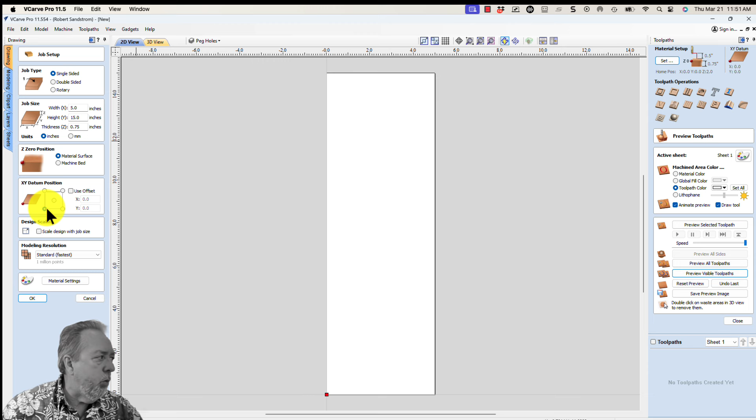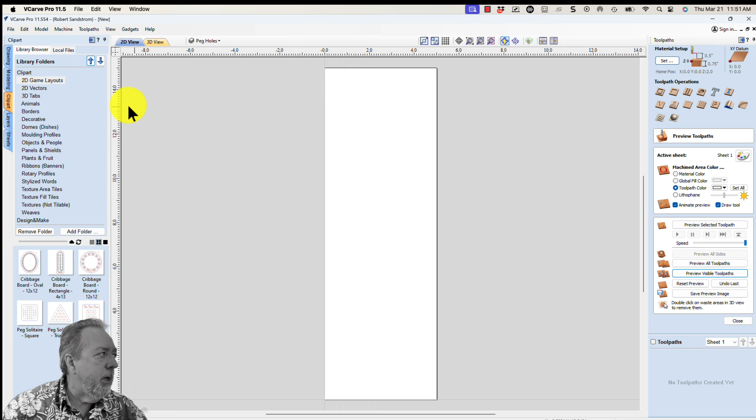We're going to go off the material surface. I normally zero off the left corner on my projects. Our standard fastest modeling resolution is fine. We're doing no design scaling or anything. So we hit OK and we're all set. We can find the game layouts that Vectric supplies to us in the Clip Art tab. So I'm going to come over to the Clip Art tab and I'm going to pick 2D game layouts. I'm going to pick the cribbage board they supply us. Double click on that, or I could have just dragged it in.

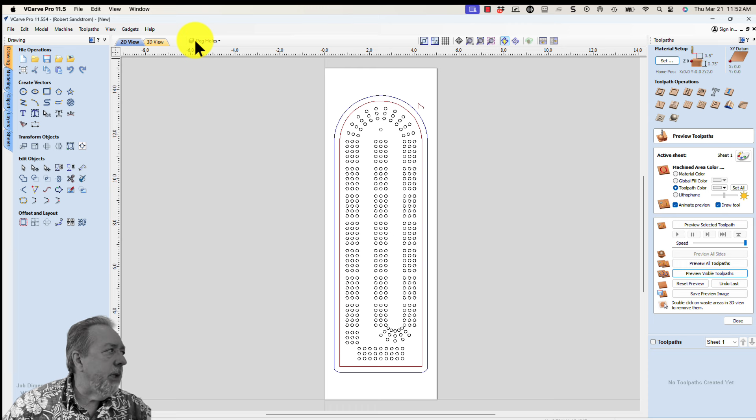Now I'm going to go over to the drawing tab since the rest of the stuff I'm going to do is there. I'm first going to check out the file that Vectric gave us, and I can see that it's already got layers. And so we've got peg holes, molding vectors, and a profile cut. So let's see what's in each of these layers. That's a good practice. When you've got layers, check to see what's in them. Peg holes, we would think, is all of the holes.

Molding vector is the profile vector or the profile of the mold that was out here, and then this other vector inside for the drive rail. We'll get to that in a second. So there's the molding shape and there's the drive rail, and the profile cut is the outside vector we're going to cut the project out with.

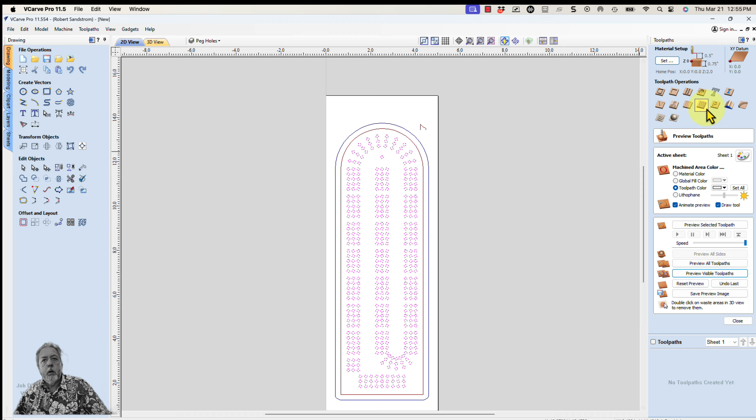So the next step is to start setting up the toolpath. Let's start with the holes. You'll notice they're grouped, so I want to ungroup them. So I can either hit U for ungroup, or I could select ungroup over here. Now that I have the holes selected, I'm going to go over to the drill toolpath. I'm going to go down 0.55 inches.

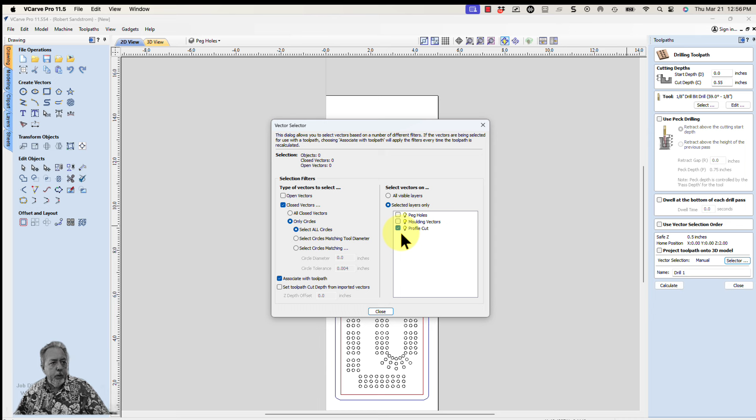I'm going to use a 1/8 inch drill bit, and I'm going to select them manually one way, or the other way I could do it if I wanted to was use the selectors. I would select the holes by going to closed vectors, only circles because they're all circles, associate with the toolpath. Then I would hit peg holes, hit close, hit calculate, and I'm going to name this peg holes. Then I'll preview it, and there's the peg holes. Everything looks good.

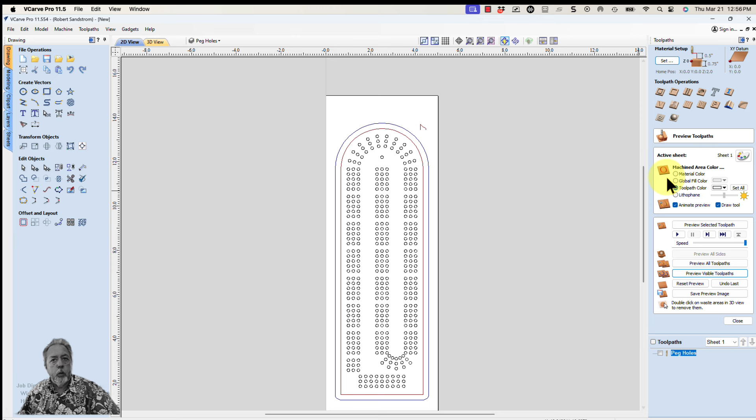The next thing I want to do is do the molding toolpath. To do the molding toolpath, I will select the molding toolpath here. And you'll notice it says I need to select the drive rail. This would be the drive rail here. And then I need to select a profile, a molding profile. So I'm going to select this drive rail, and I'm going to select this molding profile, and I'm going to

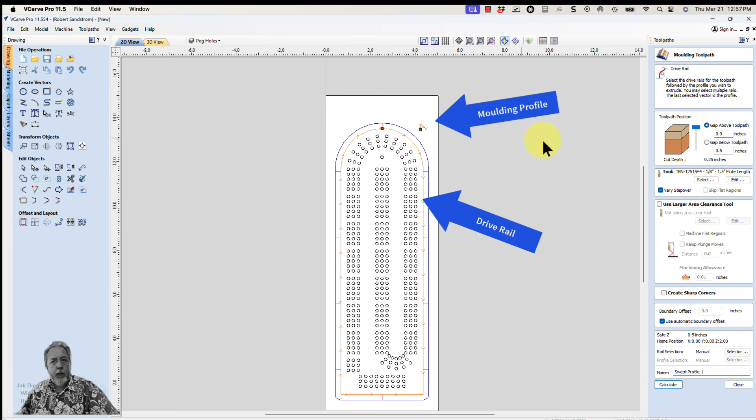look at the setup. I want it right to the top. That's good. The gap below, that just happens to be the size of the vector. It's a 0.75 piece of wood, and you can see the depth of the vector is 0.25. I'm going to use a tapered ball nose, a 1/8 inch tapered ball nose. Let it vary the step over. And then I'm going to use the automatic boundary.

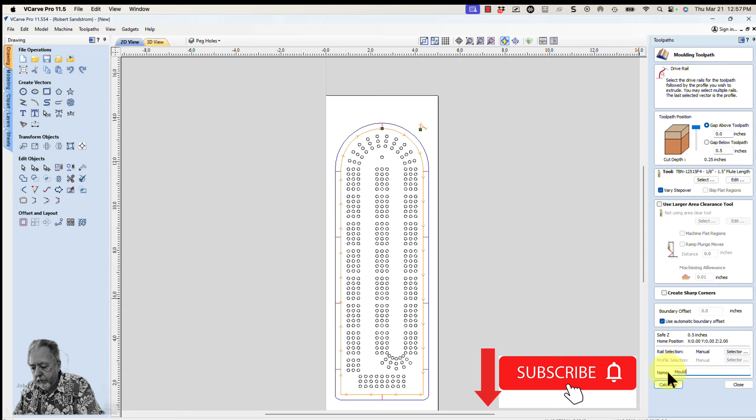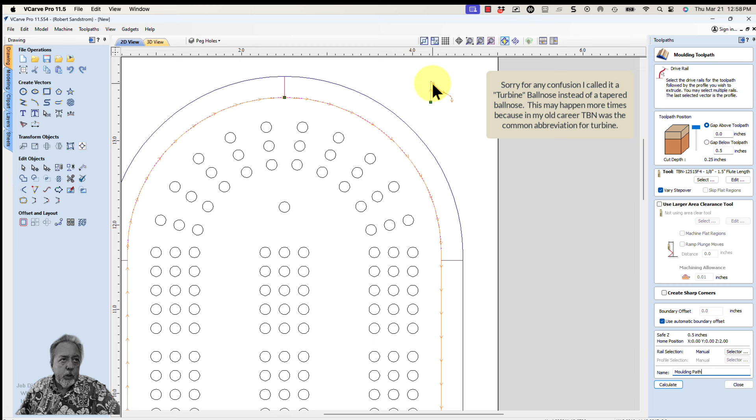I've already selected the drive rail and the profile rail manually, so it says manual, and I could hit molding path. And before I actually calculate and show you the results, I want you to notice one thing. The molding profile has a backside. So what you should expect to see because of this is that the bit will try to recreate this. So the tapered ball nose will come here, and what we will see when I calculate this is something like a juice groove back here where the bit went down to make this steep back.

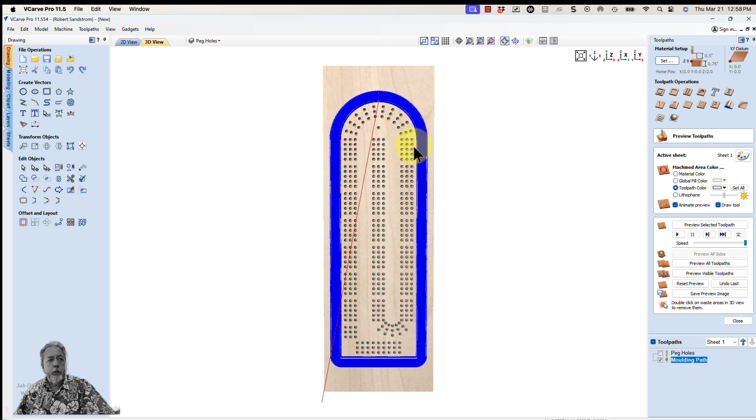That's not what we're really going to want, but there's another tip: check the vectors that are in the pre-supplied clip art to make sure that they do what you want them to do. In this case, you're going to need to fix it, and let me show you why. So I'm going to hit calculate, and now we've got our molding toolpath calculated using the vector supplied. If I hit preview the visible toolpath, you can see what I was talking about here. There's that back of that vector right in here. So that's not what we want, because we want it to go straight from the flush top side of where the holes are.

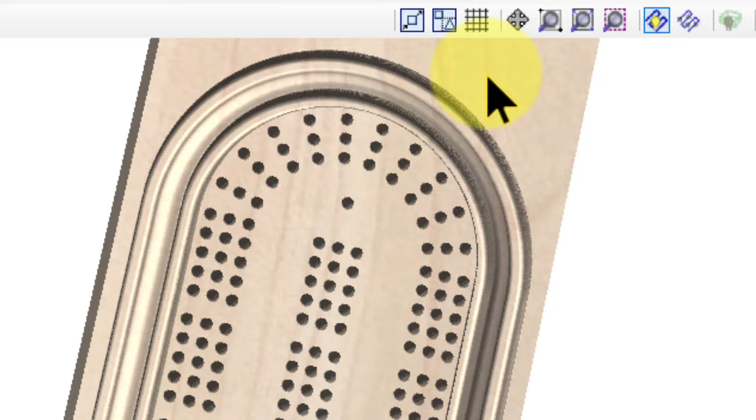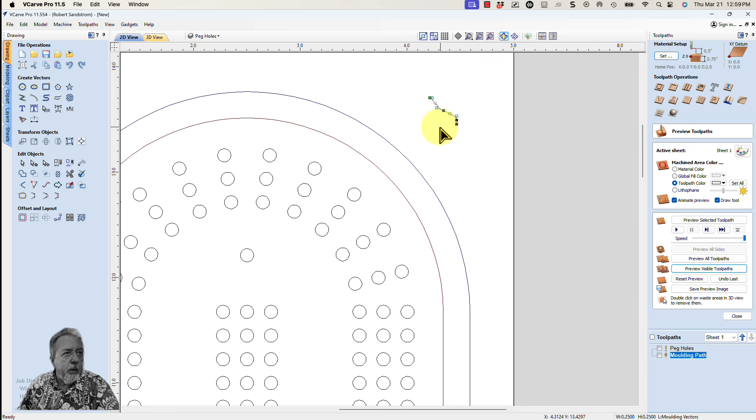So now let's go back and fix that. So we'll go back to the 2D section. I'm going to come into this vector, click on it, hit the node N, or over here I can select node here, either way. I'm going to select that vector with my right mouse click. I'm going to delete the span, or let me undo that. In this case, it's such a simple vector, I could have selected this node and hit delete point, and that would have done it also, just two different ways. And now the bit's not going to try to create this, it's just going to go straight from here and follow this path.

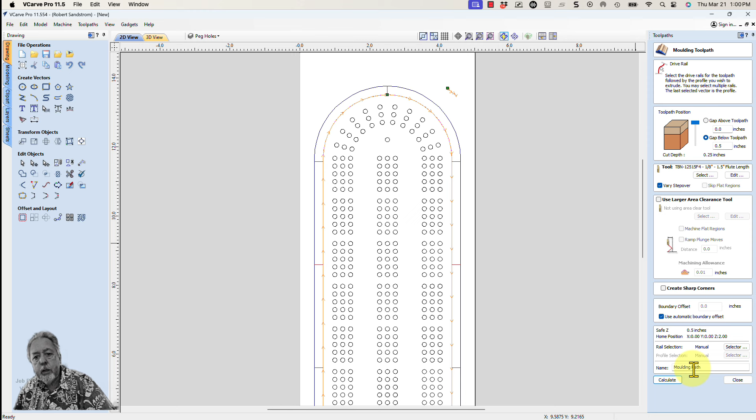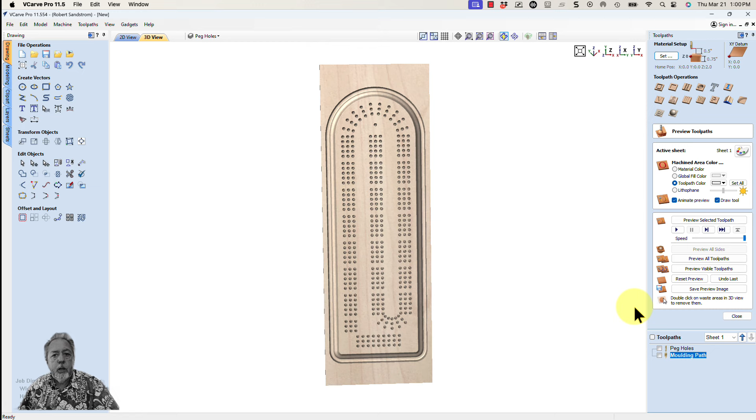So let's recalculate that toolpath. It's already got the drive rail selected, it's already got the molding profile, so we don't have to redo anything there. We're going to hit calculate. We're going to reset the preview, and we're going to preview the visible path. And now you can see the molding looks just like we want it to. And I'll do the holes just so you can see how it looks. All right, so now we've got the cribbage board pretty much done. All we have to do is cut it out. So we're going to do that next.

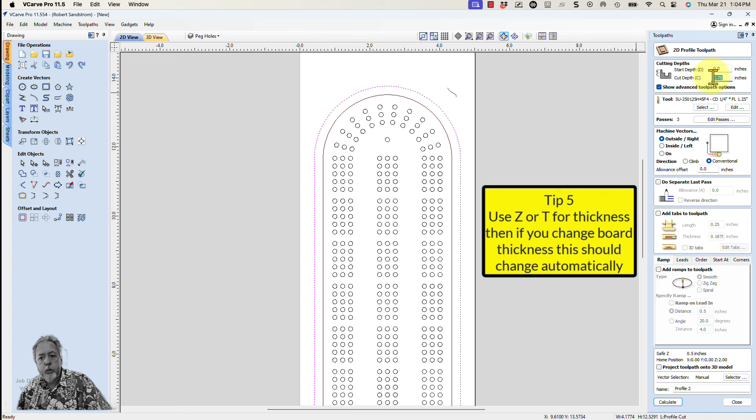We're going to come over to the profile toolpath. Now that we have the holes and the molding toolpath, we're going to go ahead and calculate the outside profile. I'm going to select the profile toolpath. I'm going to go down the thickness of the material. That is either a Z or T. I'm going to use a 1/4 inch ball nose. I'm going to go on the outside of the vector. I'm not going to do a separate last pass. I'm not going to add tabs. I am going to add a ramp of 2 times the diameter of the bit for 0.5 to minimize dwell marks. I'm not going to select the vectors automatically in this case.

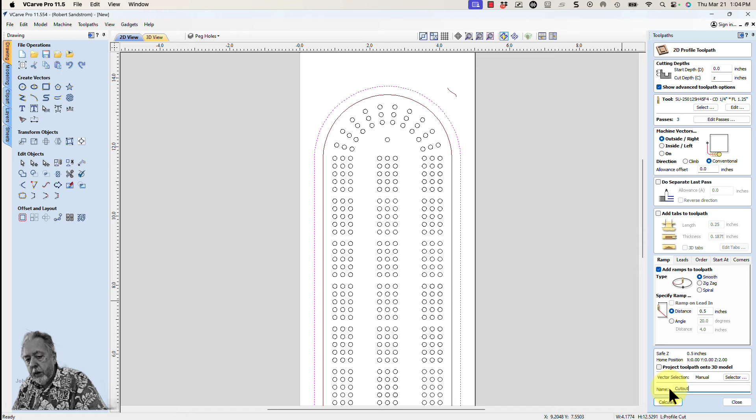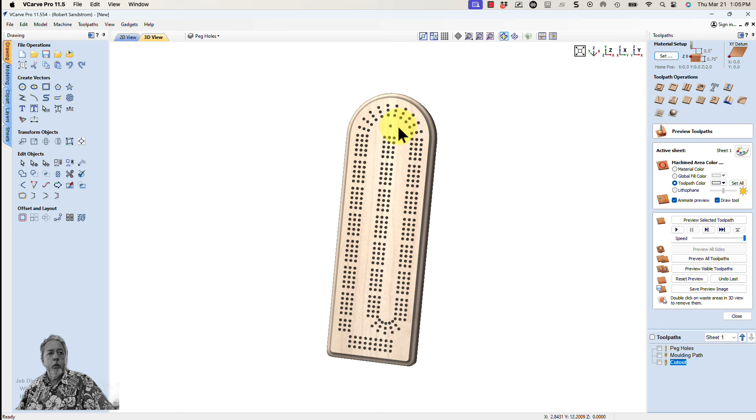I'm going to put cutout so I know what it is, and I'm going to hit calculate, and now I'm going to preview that path. So that looks good. Let's go ahead and preview the other 2 paths so we see a complete board. So that's what the cribbage board is going to look like when we're all done. Looks pretty good to me. And now you have a completed cribbage board. If I was going to do this as a real project, I would have gone ahead and added in text. But to do that, you actually need to make the cribbage board a little bit longer so you can make room for text and grid lines, etc.